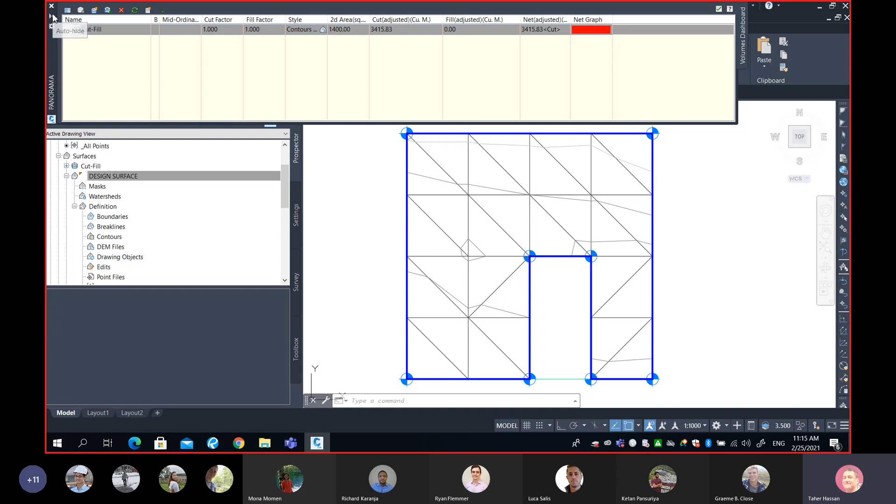If you remember? So I'm going to close this or minimize it for now, and I'll start showing you the method. So the method in terms of steps, they share the same start.

In order for you to do the second method, which is the method of sections, you have to import the points. That's number one. You have to create a surface, that's number two. If needed, you must also edit the surface if required. So the first three steps are exactly the same: import the points, build a surface, edit the surface if required. And remember, how many surfaces do I need? Do I need one surface or two surfaces?

Two surfaces. So here is the method, and I know this method has more steps and is lengthy, and I'm hoping you guys won't get bored at the very end because it requires more steps, but it's more rewarding. At the very end, we will have everything cleared and all the calculations for the client.

Now, you can see we've already done steps number 1, 2, and 3. I don't have to repeat them. I'm just going to start from step number 4. Step number 4 needs something called alignment. I'm not sure if you've learned alignment.

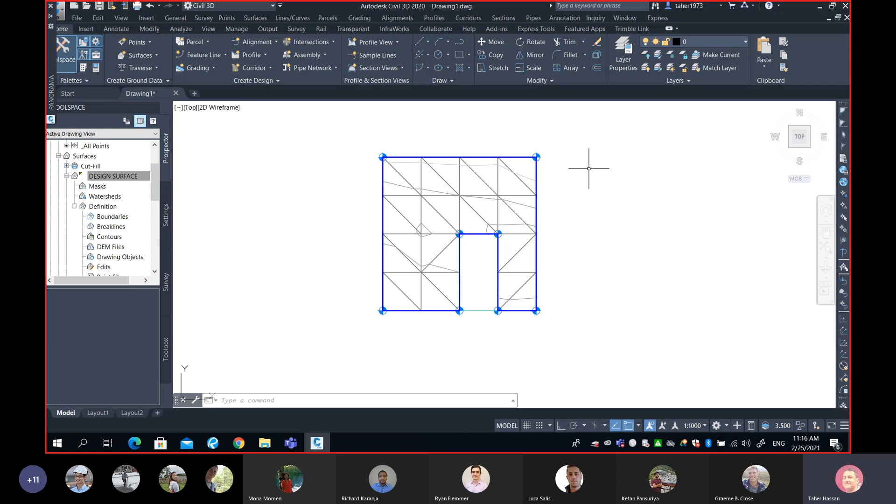Are you guys... no, you're construction management. So you haven't learned Civil 3D in other classes. Anyway, I'm going to give you a basic idea of what alignment is.

Alignment, for me here, is simply a reference line that I can cut sections with respect to. So alignment is a reference line I can ask the software to cut sections with, respective to the alignment. That's how the software operates. You cannot cut cross sections without alignment, which isn't very complicated.

First thing you want to do is draw the alignment. And here's a discussion for you, and the more we progress, you'll understand what I mean. The location of the alignment is completely optional for you, or arbitrary.

Arbitrary, what does it mean? It means I can draw the alignment on the north side. So I'm going to use polyline, and I can draw an alignment on the north side. Or I can draw the alignment at the center, or at the south. It doesn't really matter - simply wherever you define your alignment dictates your numbers going forward.

So in this demo, I will use the alignment on the north side. As I said, if you can't really get it, that's fine, just be patient. During the process, I will show you what it means that the alignment location is arbitrary. Even the alignment direction - I can do my alignment from the south to the north.

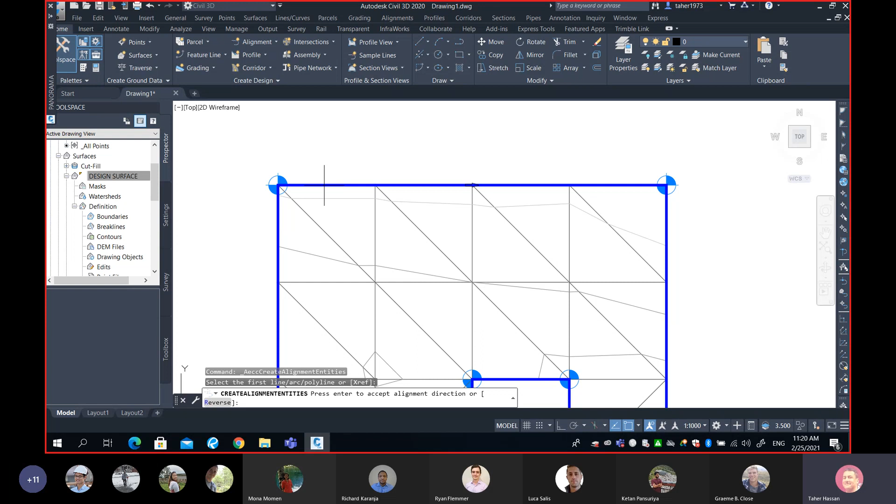Now, you can see what happens here. Do you see this arrow? I need some confirmation, do you guys see that this arrow? Yes, so this arrow is the direction of the alignment.

As you can see, my software is asking me to define my alignment from west going to east, from left to right. If you like it, you should just hit OK. If you don't like it, you just type R to reverse.

How did I know that? Read the command line, it says press enter to accept alignment direction or R for reverse. So I'm okay with that, I will define my alignment going from west to east. By the way, even if you reverse it, it doesn't matter, everything that comes next is dependent on your choice. So I will choose to go from west to east, then all I have to do is hit enter.

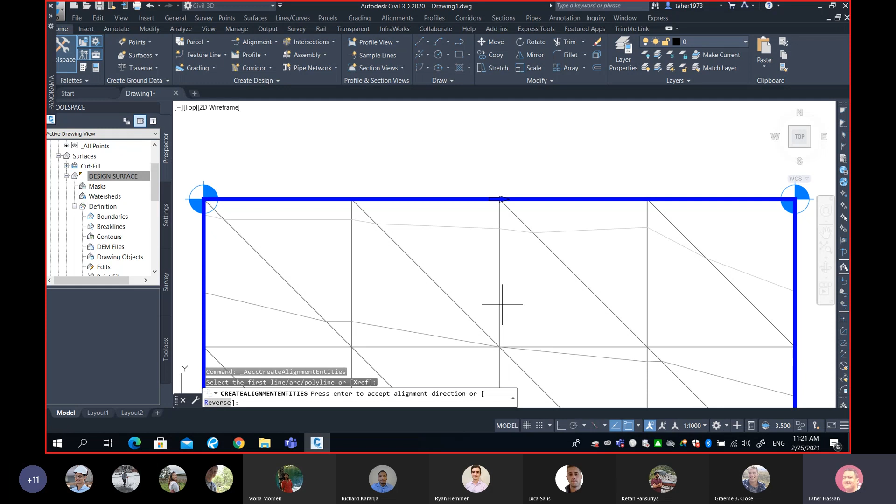Once you hit enter, the software will finalize your alignment definition by filling this window. It asks you what is the alignment name. Remember, think about alignment as the center line of your project, center line of your road, center line of your sewer, center line of your project. So I will call this one my volume alignment.

It's not really that I'm designing a road or designing a sewer. As I said before, this whole method is simply based on cutting sections, and in Civil 3D you cannot really cut sections without an alignment. That's why I had to define an alignment.

You can see next we have a description, that's optional. We have a side, that's also optional. We have a style, which defines the shape of your alignment, red or blue. Again, leave it as is.

For the labels, we want to do some labeling, so we add some labels. I'm going to add major and minor labels only. Then there are two more options: it's asking do you want to add any curve? No, I don't want to add any curve. Do you want to erase existing line? I'm going to say yes, erase it.

Very simple: a name, and then a style, just leave it as is. Add some labels, don't add any curve, and then erase your polyline. Please watch as I hit OK.

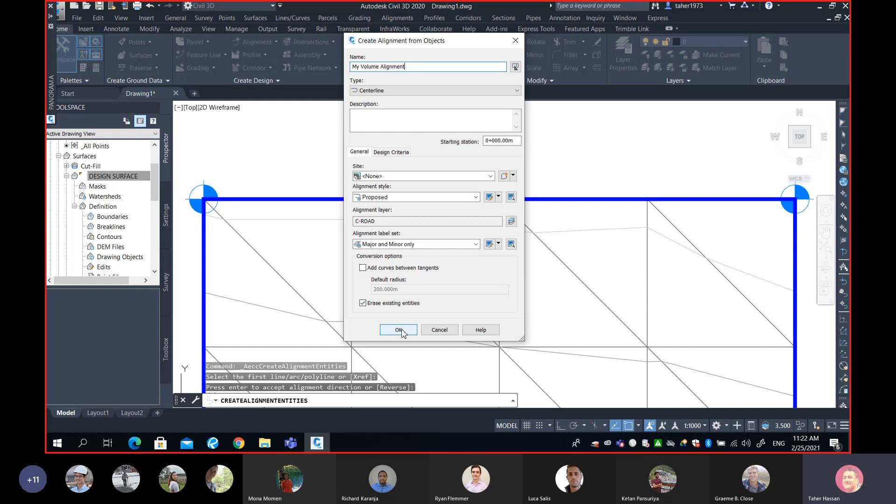When I hit OK, something has happened. Do you see those numbers? Does it remind you of anything we learned in class? 0 plus 000, 0 plus 020, and 0 plus 40. Do you know what those numbers are?

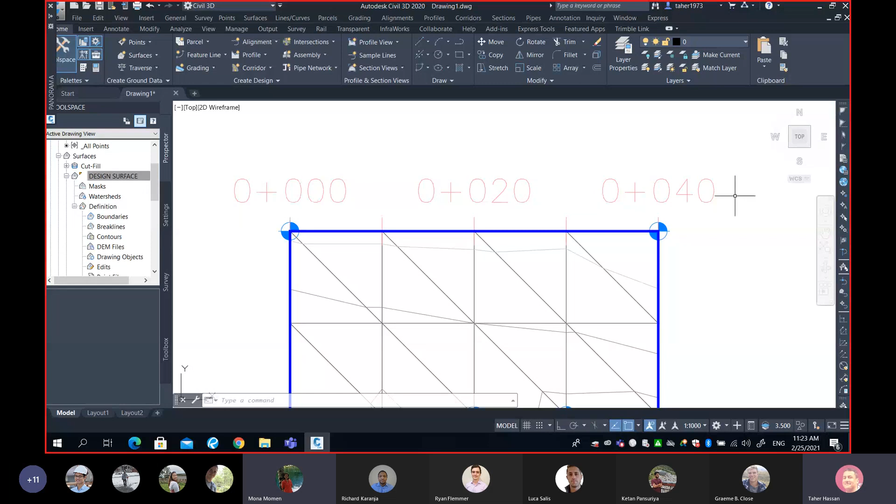Stations, those are the stations, correct? Thank you so much, those are stations. What does it mean? It means my alignment length is 40 meters. And you can see every one of those cells is 10 meters. If you remember, here is my problem, it was 10 by 10 with total length of 40.

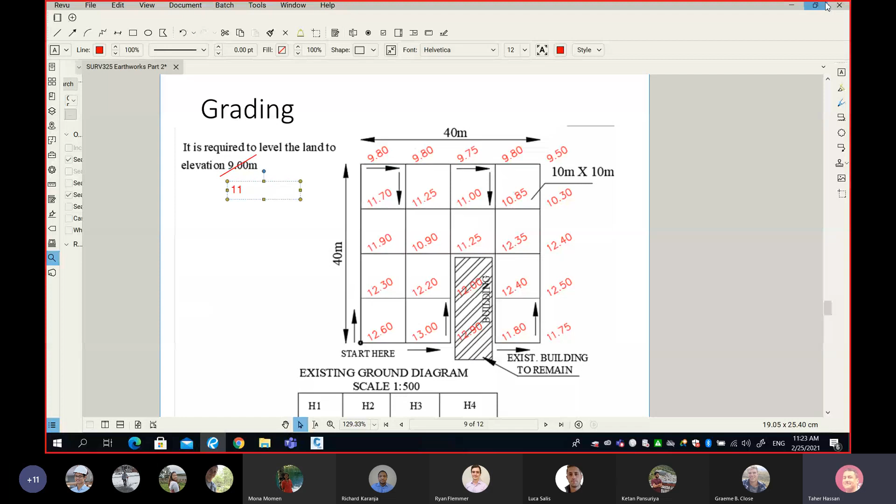Okay, now what is next after you define alignment? Watch this, we're going to start right now cutting sections through my alignment. So how do we cut sections? We go from the menu called sections.

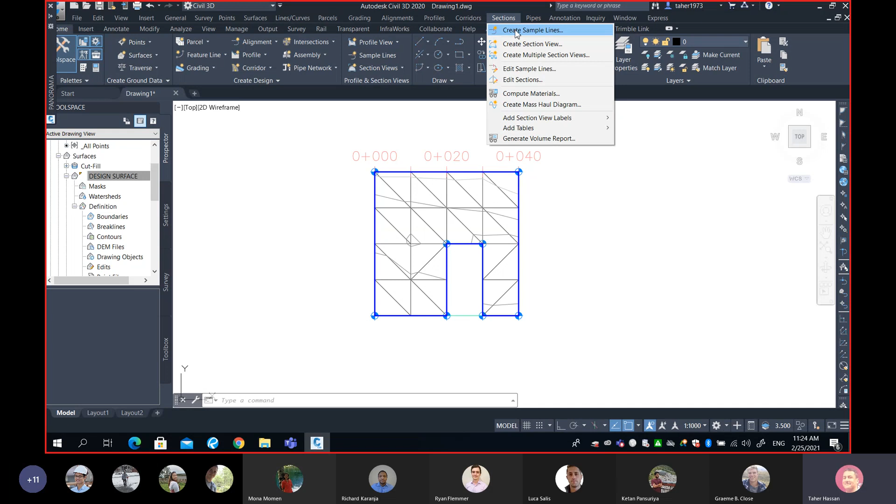From menu sections, the next option is called create sample line. I will explain what I mean by sample lines in a second, but let's do it for now. So from menu sections, you go and create sample lines.

So the software is asking you - please always read the command line - it says select alignment, or press enter key to select from a list. So the software gives you two options: either manually click on the alignment in the plan view, or the other option is to click enter.

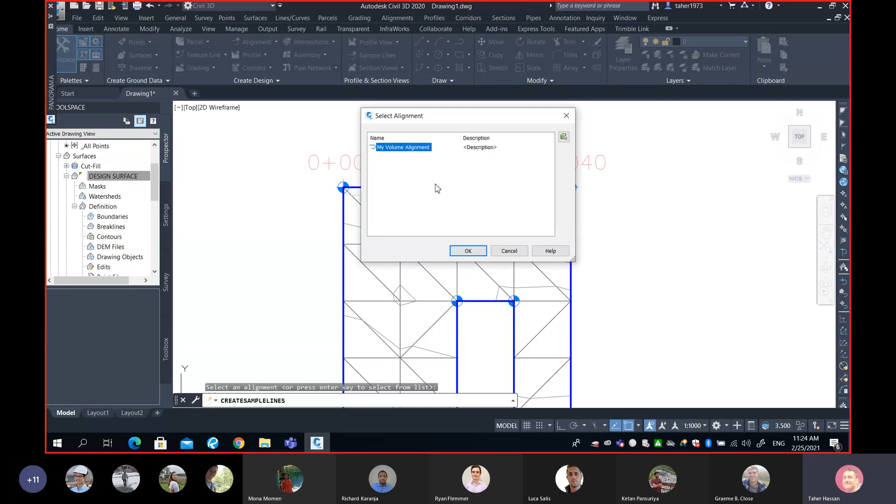If you hit enter, see what happens. The software will open a list of all the alignments in this drawing for you to pick. You can see here my drawing has only one alignment, so I'll choose my alignment and hit OK. Right now my alignment has been selected.

Number two, the software is asking you to create a sample line group. Sample line group.

Which is a collection of sections. A collection of sections. In general, in our exercise here, we will create only one sample line group. But in general, if you're estimating the volume of a road, and the road is, let's say, 30 kilometers, and every 10 kilometers is built by a different contractor, in this case, you want to group the first 10 kilometers in one group, and the second 10 kilometers in one group, and so on and so forth.

In here, I will call this one 0-40. Sample line group, a group or collection of sample lines. The right side here is simply a style, so I will leave the style as is. However, the bottom right is important. So we are going to cut through two surfaces, and you can see their names here, EX surface and design surface. If you uncheck this one, what does it mean? It means don't cut through. So we have to cut through those sections.

This column here, it's about style. Right now, it's not really a good idea, because when I draw the section, it is not gonna look great, because whether I cut through the existing ground or the design, they will use the same style, which is called existing ground. Both of them will look black, and we cannot differentiate visually between them. So I'm going to change one of them. I will leave EX as existing ground style, and I will come here, double click, and drop this menu. We have another style here already for us called finished.

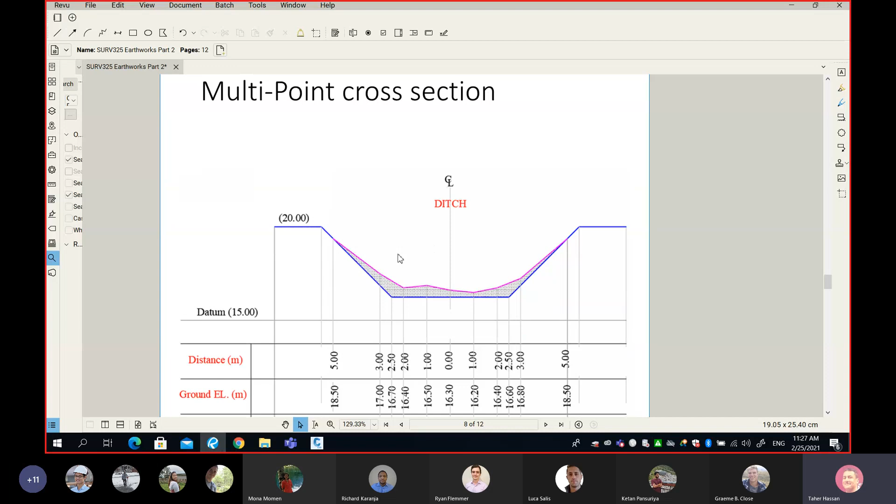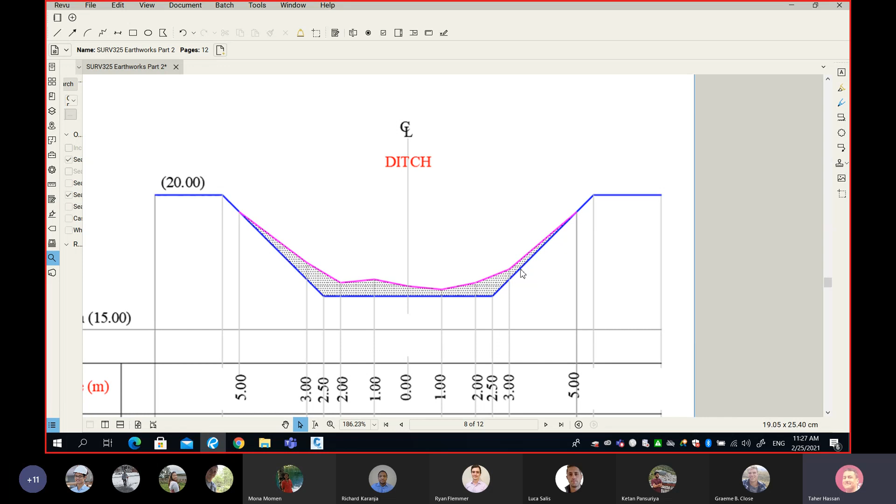What does it mean? It means when I am ready to plot my sections, the existing ground line and the design line will look different. Let me remind you here, look at this. What if I give you this section here, and both of them are in blue? If I plot all of them the same, blue and blue, would you be able to know which one is the design and which one is the existing ground? I guess there's a difficulty. All I did, to be honest, is change the style, so this will look magenta and this will look blue. That's what I did here. And that's it. I'm going to hit OK.

Now, the software is ready. Watch my screen. If I move my cursor left and right, it is simply ready to pick where I want to cut my section. I can cut my section here if I click, or I cut it here. I can cut my section anywhere I like. Now, also you will see here there is a tool which allows you to have more control over where you cut your sections. So if you come here, you drop this menu. There are several ways, 1, 2, 3, and 4, that you can cut your section.

One is by a range of stations. Another one is you specify a station at a time, and other methods. I'm going to go with this one for now, and I'll tell you why later on. I'm going to pick the option at station, which means the software every time will ask me at which station you want to have a section. So I'm going to give the station, and so on and so forth. So let's pick at station. And please read the command line. Software is waiting for some input from the user.

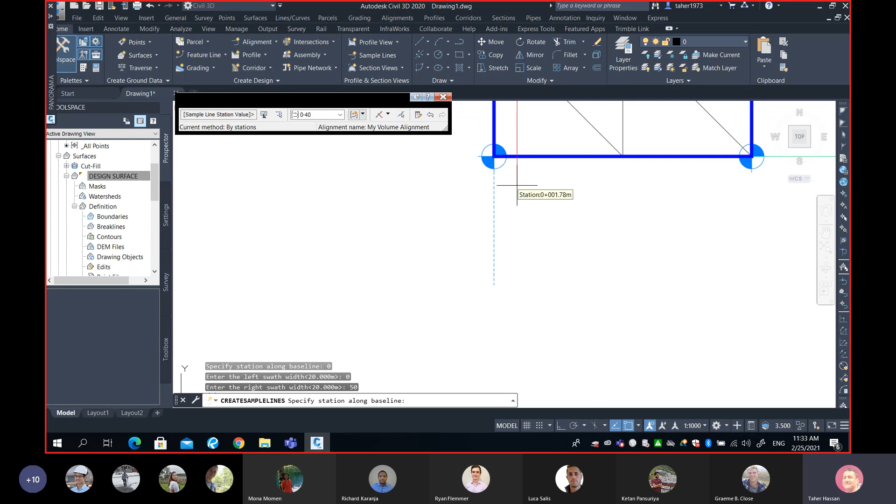Now here is another question for you. What if I ask for 30 only? Is that a mistake? Like to the right of the alignment on station 0. What if I ask for 30 only, not 50? Is that a mistake? Yes. It's a mistake. Why is that? Because if I ask for 30 only, my section will stop here, and my software will plot a section only until here and ignore anything past this area, which means my cross-section area will be wrong.

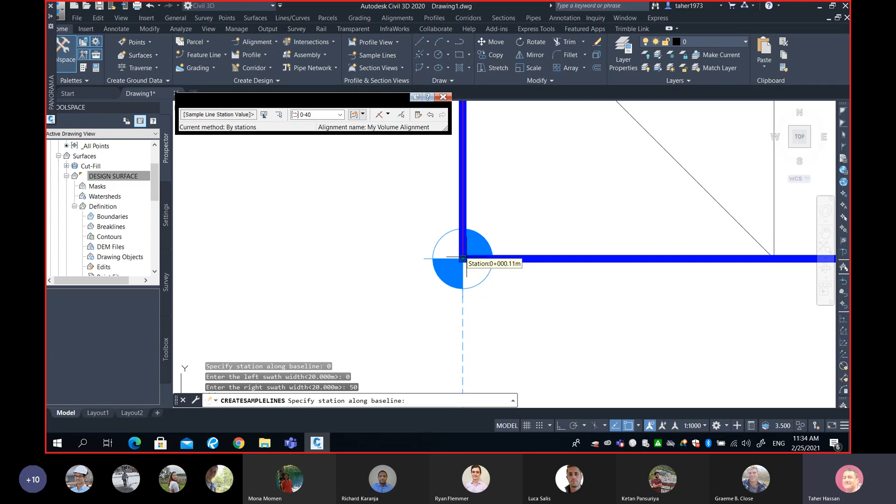And that's why here is the rule. The rule is my sample line, at minimum, goes to the end of my surface, and if you extend it beyond this point, it's still okay. But the minimum is to this line here.

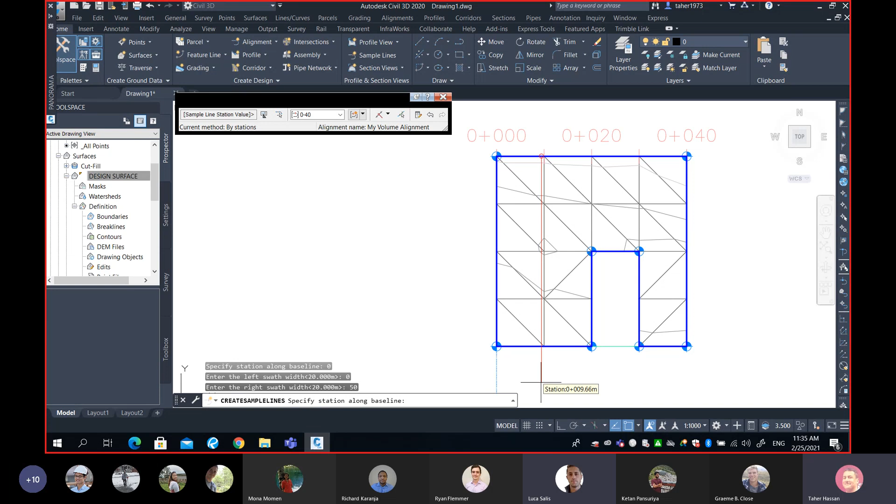Now, we already finished our first section, and the software is asking me for another section. You can see here on the command line it's asking me where I should place my second section. 20. Okay, 20. So I guess Sana is asking me to add my section here at 20, where my cursor is right now. Is that right or wrong? Should I go from 0 to 20? What do you think?

We need it at 10. Yes, thank you so much. So guys, why 10? Because look at the data. My data, if you remember, I have a data point here. So if I go from 0 to 20 right away, I'm simply not making use of my surveying data. So my spacing between the sections should match my surveying data spacing. So my next section is at 10.

Now I'm asking you, how much left of the alignment if I go at 10? How much on the left when I cut the section at 10? Do I need anything on the left? No, we don't have. So we can add 0, but I'm asking you, if I write 10, is that a mistake? So the minimum is 0 because you can see my surface ends on my alignment, which is on the north side, and simply there is no surface on the north. It means I can write 0, but if I write 10 instead, is that a mistake?

Hello. Yes. So if I write 10, it's a mistake? Well, it's going to consider cut or fill in an area that we don't need. No, I mean, listen, you know what? I wouldn't argue. I'll just make it 10. I'll show you on the cross section. It doesn't harm us because simply there is no surface. So there is no calculation whatsoever. So I'm gonna say here's 10 again, and I'll share with you why I'm writing those extra in a second. So here is 10.

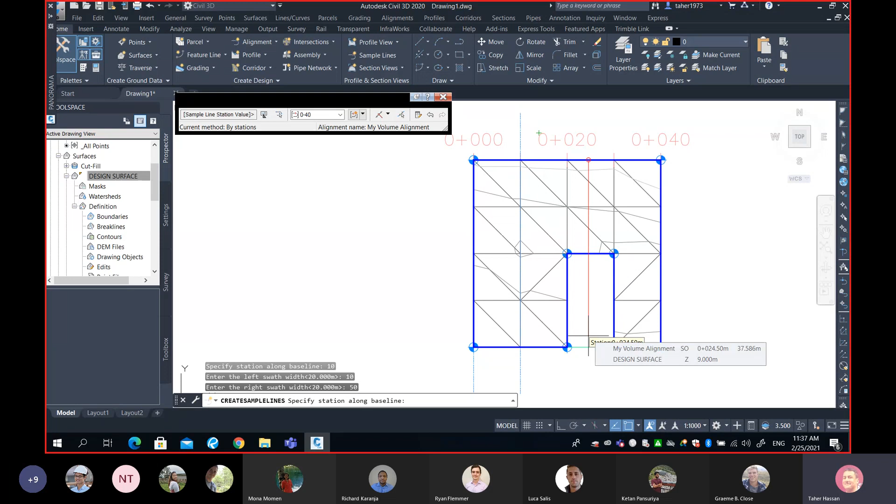Now I need to ask you what you think should be my next section. 20. Thank you. How much on the left? 0. Thank you. How much on the right? 40. Thank you. Okay. So we have another sample line. I'll zoom in and show you. Here is another sample line, not very clear because it aligns with my triangles. Now, what is my next cross section? I did 0, 10, 20. What do you think?

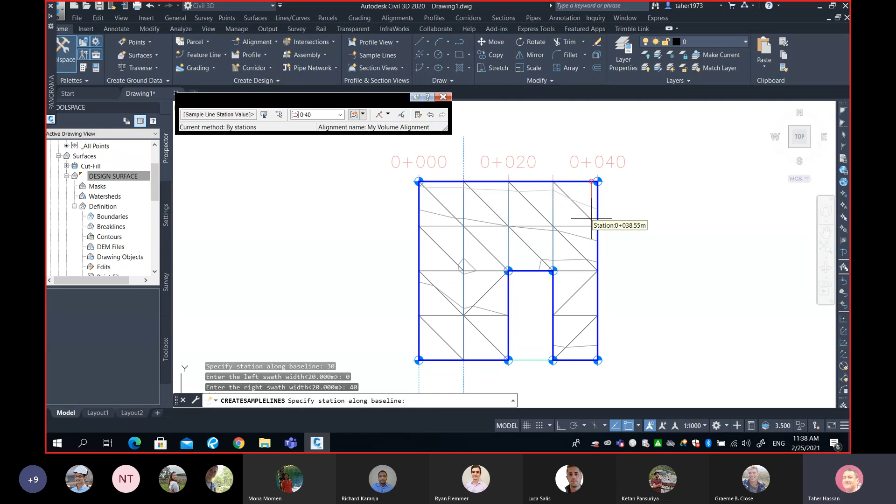30. How much on the left? 0. How much on the right? 20. Okay, I will make it 40 for now because I have a discussion here. So I'm gonna make it 40 on the right. Now we can see we have added another sample line. Now, please, what is my next section? 30? We've done the 30 already. 40. How much on the left? 0. How much on the right?

40. Okay, so you know what? I will just hit OK right now and finish my command line. And you can see here, I have added those sample lines: one at 0, 10, 20, 30, and 40. Now, I want to remind you that the location of my alignment was arbitrary. I chose my alignment to be on the north side. Anybody got it already that I could have made my alignment in the center?

What if I made my alignment on the center? My cross sections will be at the same location, so 0, 10, 20, 30, and 40. But how much would I ask on the left? If I made my alignment here, I'm gonna draw a line here. Let's say that's my alignment. 20 on the left, 20 on the right.

If my alignment were here at the center line, when I cut my cross section, how much should I ask on the left? 20. How much on the right? 20. What if I had defined my alignment on the south side? For example, here. How much to the left? 40. 40, and 0 to the right. There is nothing on the right.

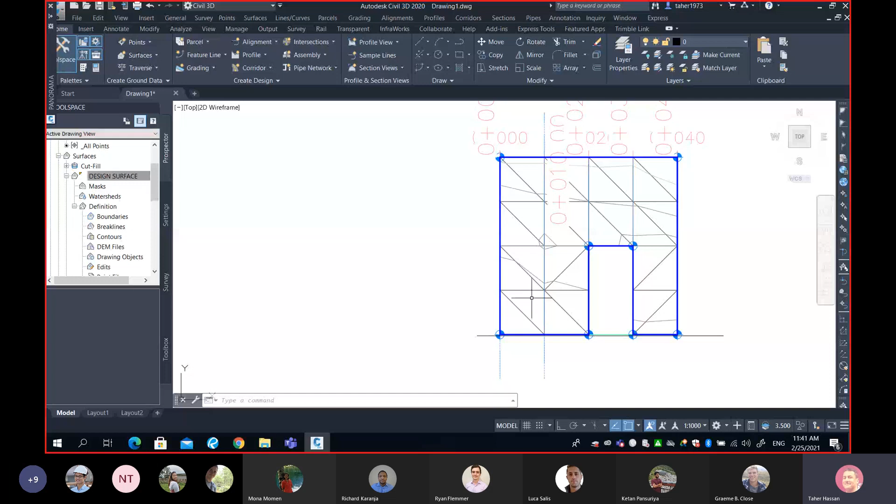For example, you can see here, I went a little bit more, like 10 meters more. In the second section, I went 10 meters more on each side. And one thing I want to mention is that those are dynamic lines. What if I change my mind and want to make them exactly as they should be? I can click here, get the grip, and stretch it back to here.

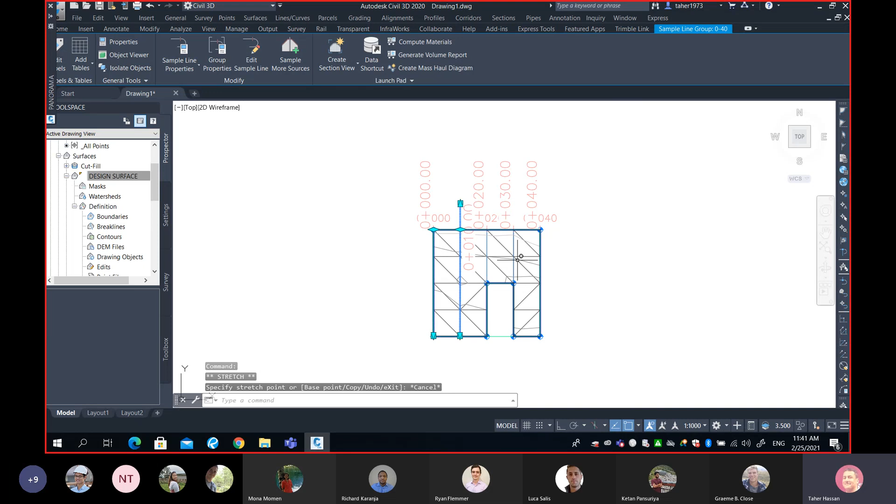I can do the same thing here. I can take this guy, put it back here. And on this side, I can take it and bring it back. So those are dynamic lines, and you can change them anytime you like. Are you guys following so far?

Yes. So listen, I know the method is kind of long and I go into many small details so you can understand it, but here is the big picture. We want to cut sections through the ground, find the area of the cross sections between the existing and the design, and then from the cross section areas we find the volume using trapezoidal or Simpson. Hopefully you don't lose the method.

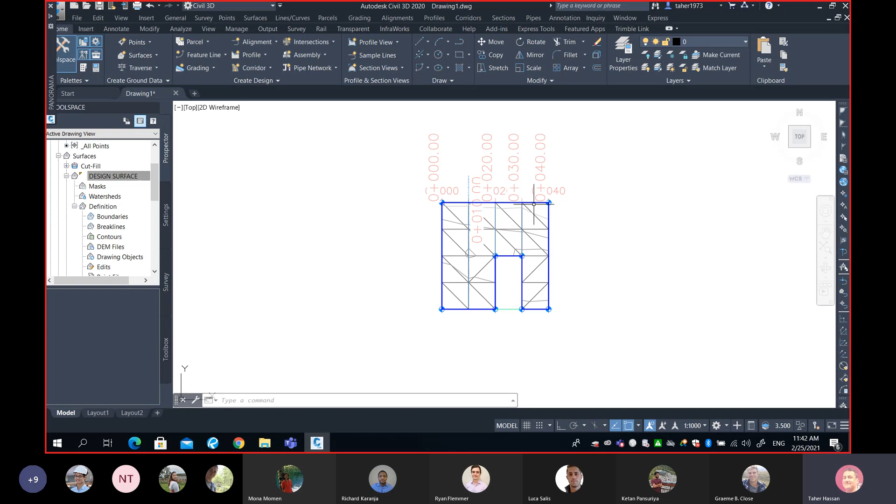Very simple. So far we have an alignment and we have cross sections, and I can show you how they look. The sample line is just a line on the plan view that marks where my section is and what the extent of my section is. Let me show you the cross sections.

To plot the cross sections, go to the Sections menu, and you can see an option called Create Section View, and the next one called Create Multiple Section Views. If you want to plot only one section, use this option. If you want to plot all of them, use this option. For now, I will just create one view. I want to show you the section at 10.

Let's click on this option, and I get this window. Remember, we have to pick an alignment. My alignment is called my volume alignment, and the sample line group is 0 to 40. Look at the sample lines. How many did we create so far? 5. Sections at 0, 10, 20, 30, and 40. I am going to choose the one at 10 for a reason; I want to show you something on the cross section.

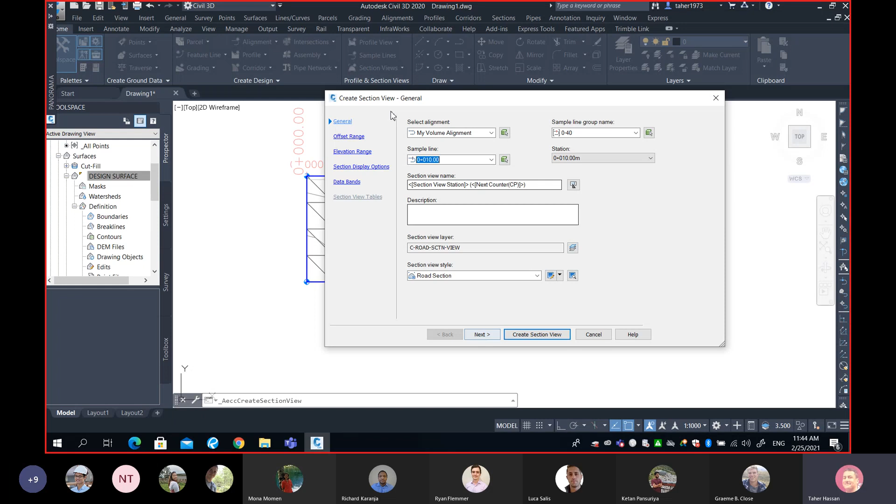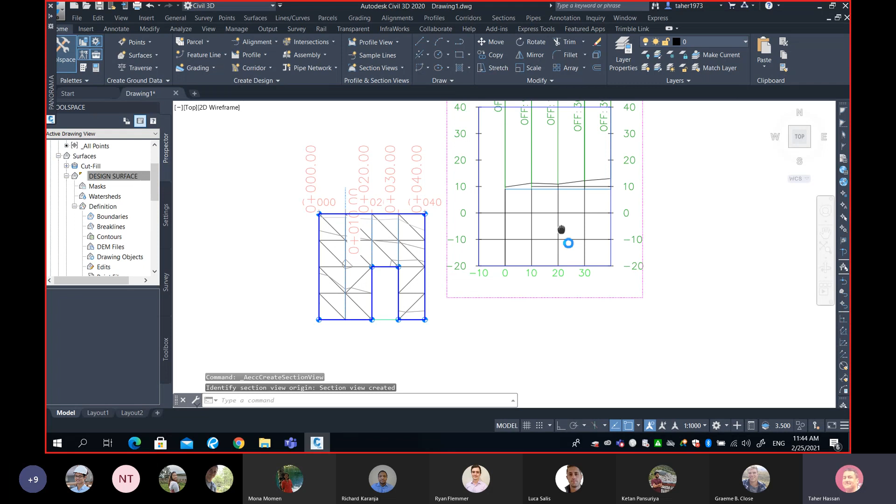Everything here works like a wizard: you go into General, change some parameters, like the style, and when you're happy you click Next. The arrow goes from General to Offset Range. Change parameters if you like, then next, and next, until finally you click Create Section View. The software asks where you want to plot your section. So here we go, here is my section.

Now, guys, look at this. So this is my design, which comes in blue. So that's my design elevation at 9, which is blue. And this guy here is my existing ground in black. And that's why you can see they show in different colors.

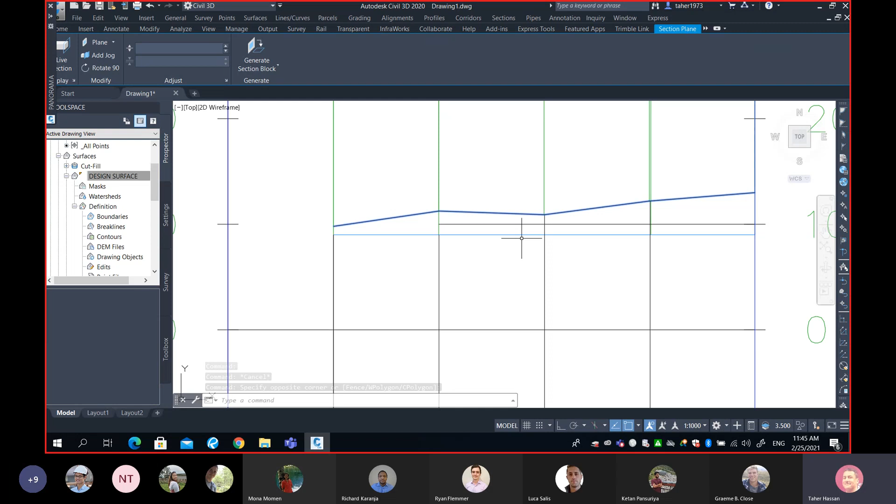Now look at my section. How much did I ask for on the left? Look at the plan view. So this is how much, I'm going to circle it for you. So this is how much I asked for on the left. I asked for 10 meters, correct? Look at my cross section. So this is 0, that's my alignment, and I went 30 meters right of the alignment. But I asked for 10 meters left of the alignment.

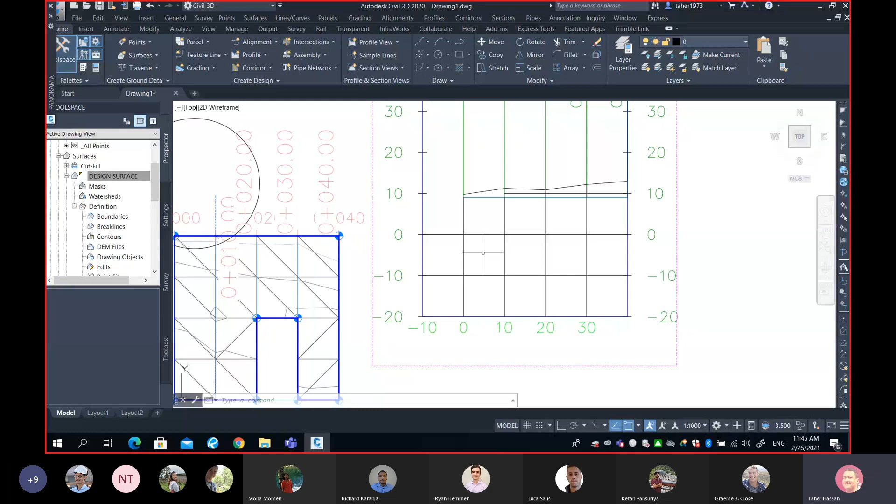Look at this. Do we have any surface? No. And that's why, look at this. I just wasted a little bit of paper, but it's not a mistake. My section is only wider, but there is no surface, so it doesn't change my calculation. Because my calculation, the area will be between the black and the blue.

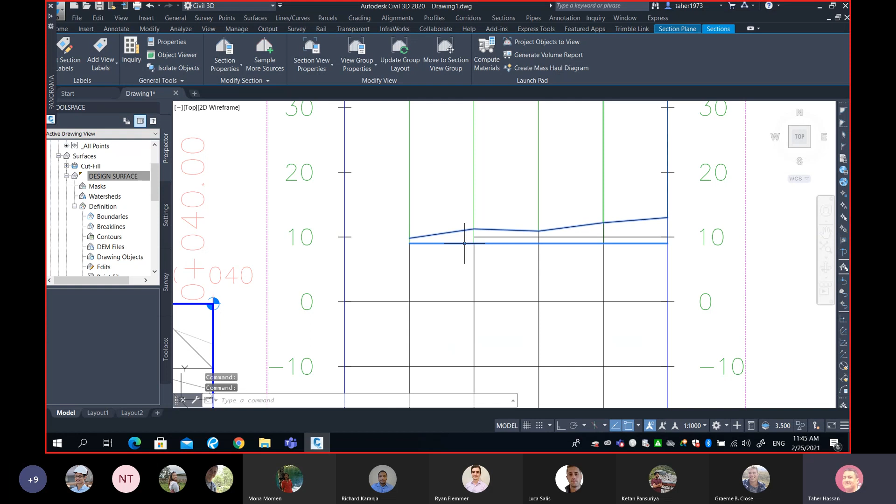Now I'm going to show you the mistake if I make my sample line shorter, and I will do that right now. I will come here and take this guy, stretch it back to this point, to the intersection. So I'll place it here. Now look at my section. Do you see the magic? When I stretch my sample line back to 0, did you see what happened to my section? Yes, there's a surface now. Okay, so my section is already cut back to the alignment only.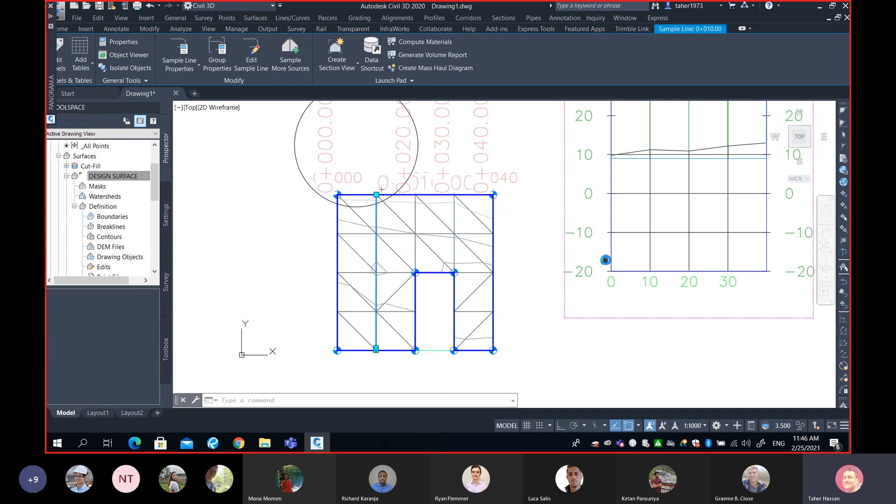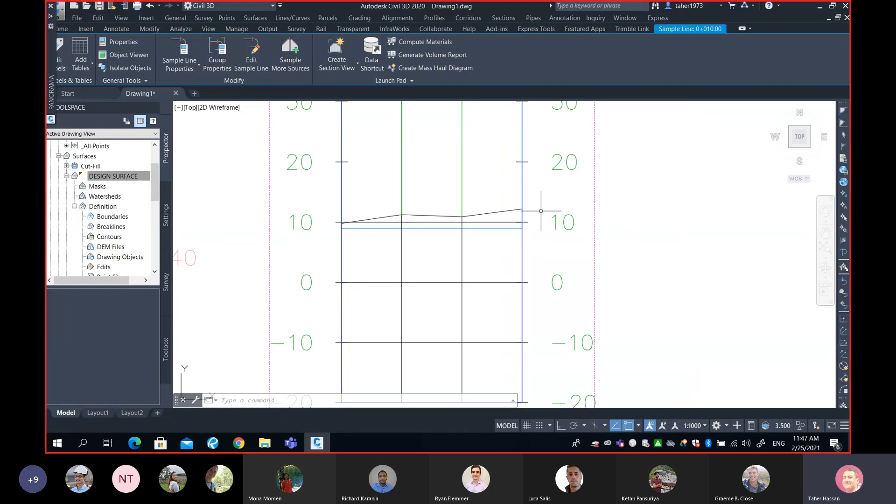Now I will try to show you the mistake. What if I stretch my guy here and I go from 40 to 30? So I'm going to stretch it back to the intersection here, to the 30. Now look at the cross section. It followed me. It went from 0 to 30, and anything after 30 is not on the section and will not be estimated. Hopefully this shows you the danger. If you make your sample line shorter, it doesn't cover your surface.

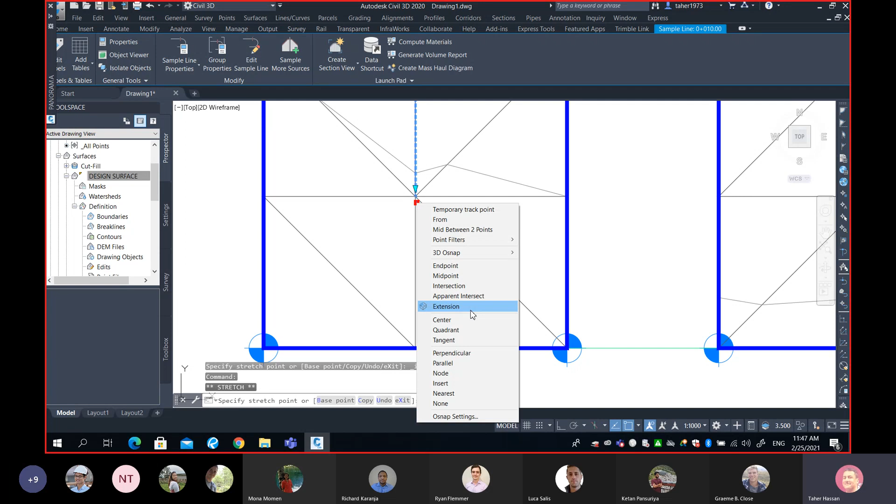To correct this problem, what should I do right now? Just extend it. Yeah, not extend, it's called stretch. So I'll take this grip and place it here at the intersection one more time, and I will look at my section. My section is dynamic. Whenever I stretch my sample line, my section will follow. So this is my section here. It goes back to 40.

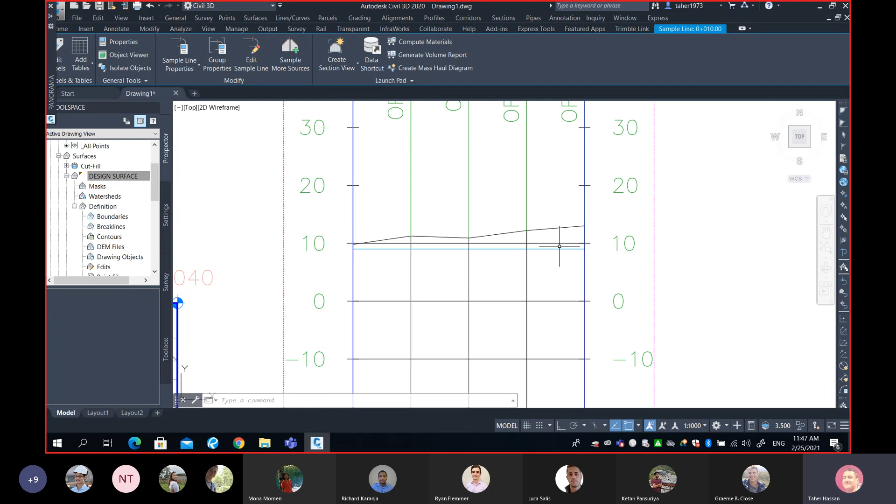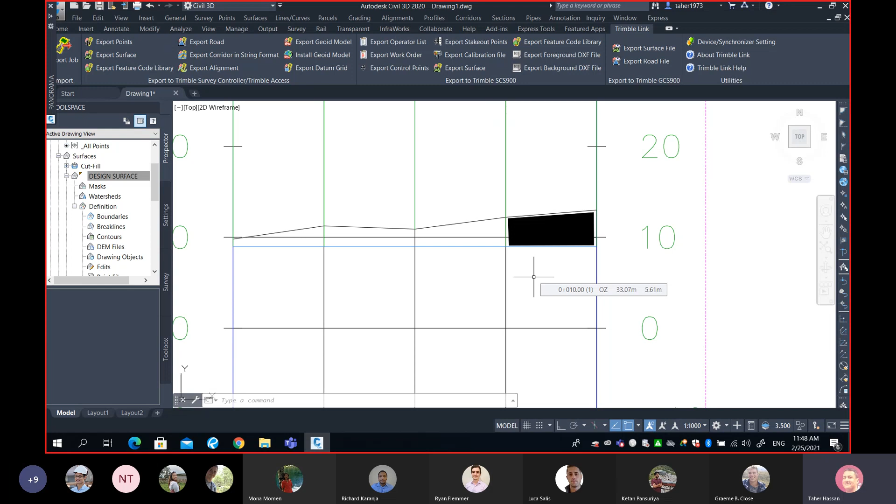And remember, if I only go to 30, all this area here, from here to there, will simply be ignored. I'm going to hatch it for you. So if I make my section to 30 only, this area in black will be ignored. And that's why the minimum extent of your section should go to the end of the surface. Are you guys following? I know I'm repeating myself because this is very important.

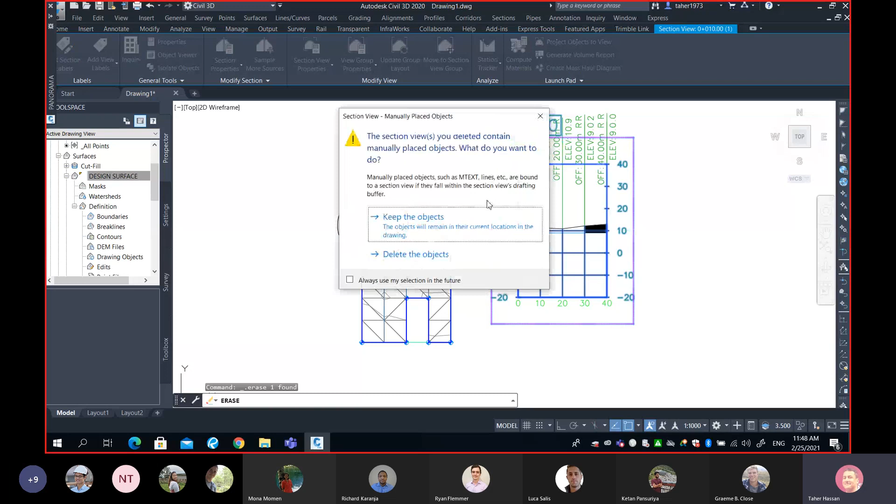Are you following? Yes. Okay, so I will just delete this guy. I don't have enough time today to finish this method. But so you know, we have finished step number 1, which is defining the alignment. Number 2 is cut sections, and we're able to plot sections right now.

In the next class, I will show you a couple of steps needed. If you already started with me, please make sure you save all your drawings, because next class I'm not going to start from scratch. I will build on whatever I have right now.